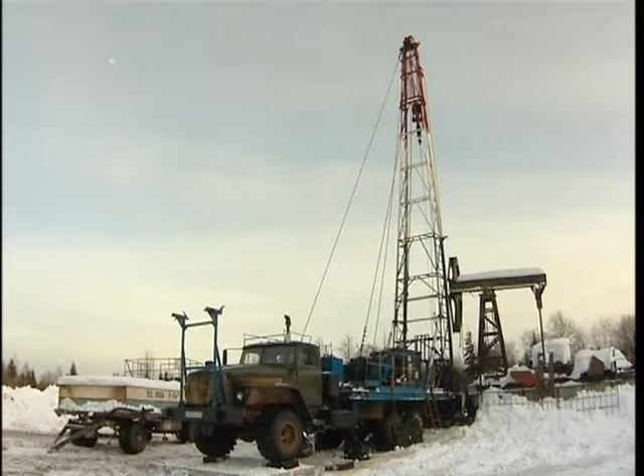Secondary formation exposing is one of the most important tasks solved during well completion. The primary function of any perforation is to ensure dependable hydrodynamic connection in the well reservoir system.

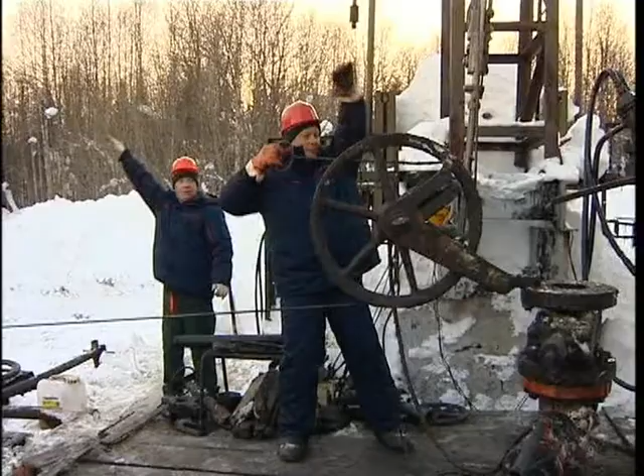At present, there are three main techniques of secondary exposing of producing formations in cased wells: shooting, hydraulic jet perforating, and mechanical method, which includes drilling.

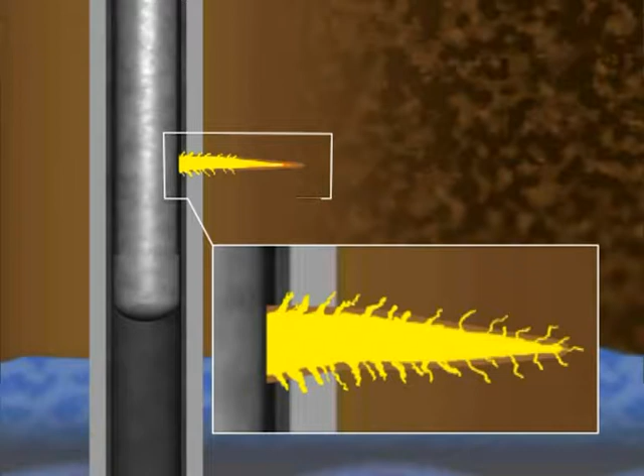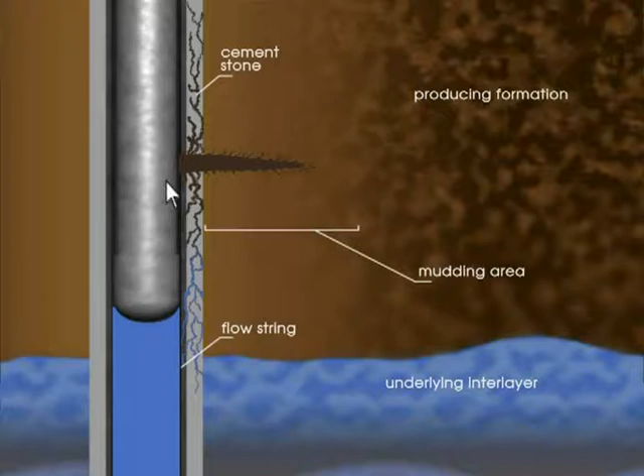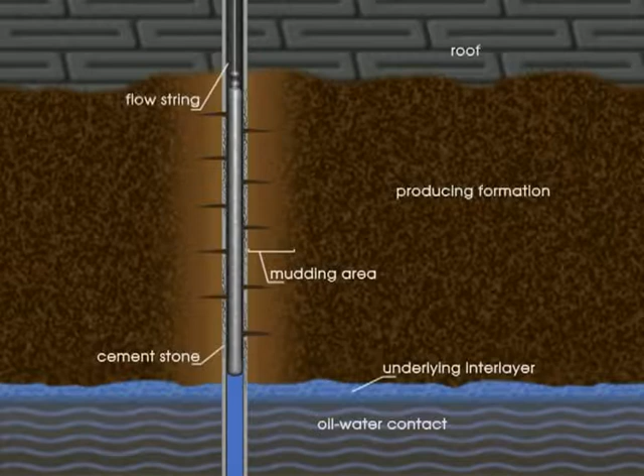Besides, the channels formed are rather shallow and intercommunication between the formation and the well is incomplete. Such exposing does not permit correcting errors made during primary exposing and cementing; they are even aggravated. These disadvantages determined the activity in search for non-impact techniques of perforation and devices suitable for such purposes.

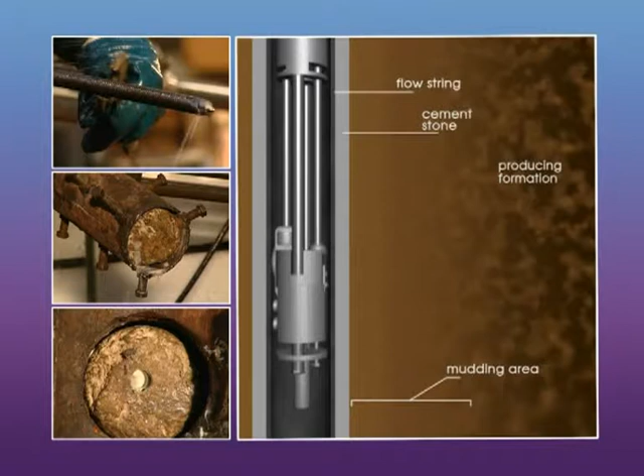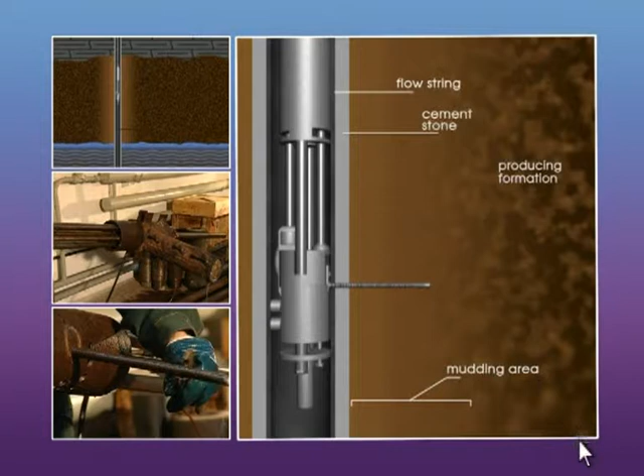Drilling is classified as a sparing technique. Unlike shooting and hydraulic jet perforation, it affects neither the support integrity nor the lithological properties of the producing reservoir rocks.

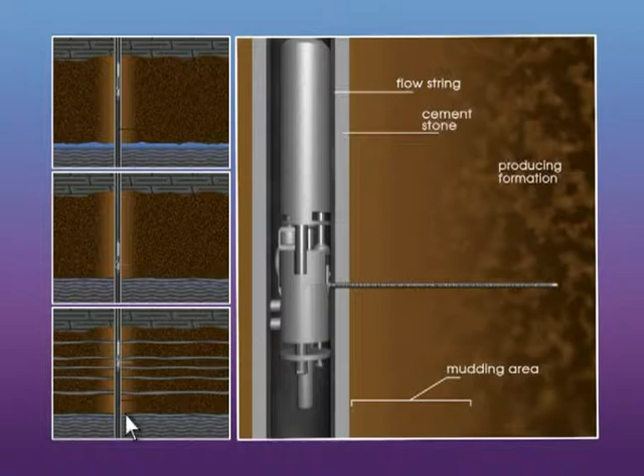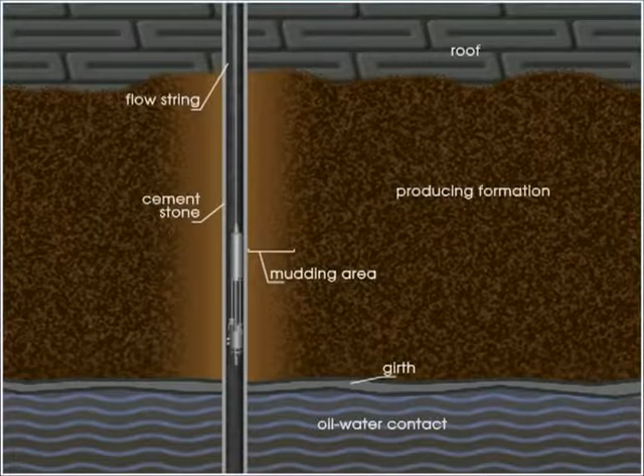Drilling with deep penetration of perforations is efficient in wells of any destination operating producing formations of various types and lithology. However, unlike other types of perforation, the greatest effect occurs when exposing producing formations with bottom water objects, where the oil-saturated portion of the reservoir is separated from the water-saturated portion by a thin, unstable girth, or when exposing permeable interlayers of thin layer formations selectively.

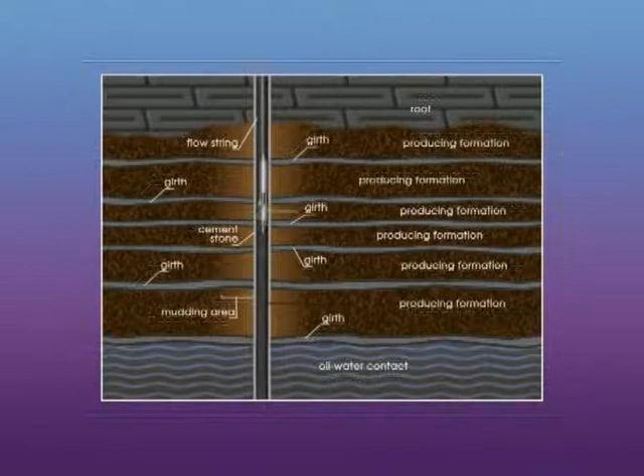A good effect is expected if drilling is used as an intensification method during additional perforation of heavily mudded reservoirs which have been operated for a long time.

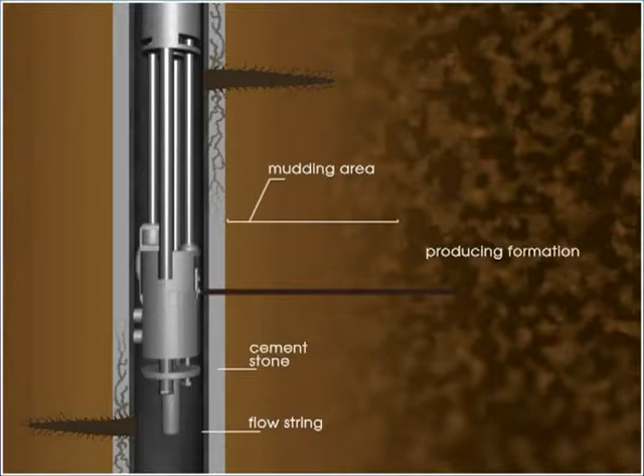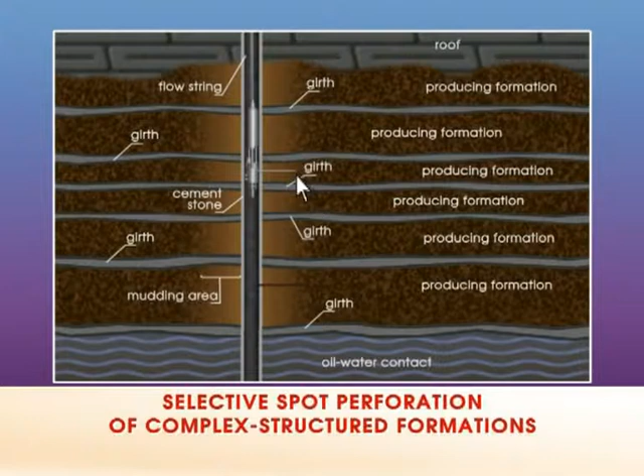Efficient hydrodynamic connection in the well reservoir system. Minimum skin factor. Selective spot perforation of complex structured formations. The well bore support remains unbroken. Thin argillaceous girths remain unbroken. The natural formation structure is not disturbed.

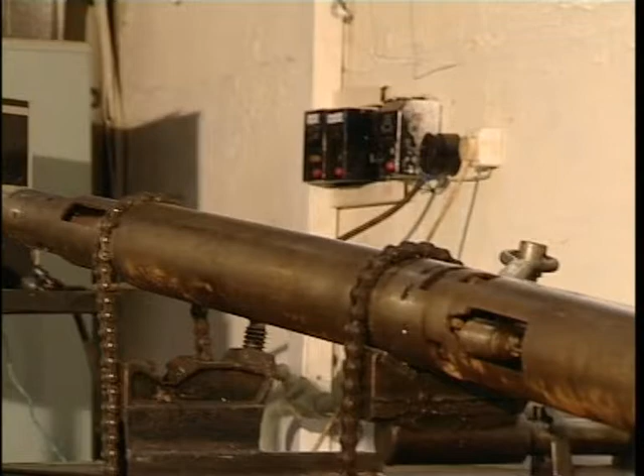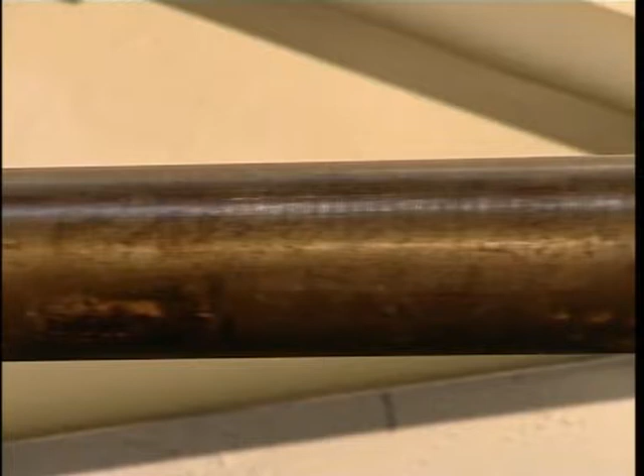In order to solve these tasks, the Permsky Engineering-Technical Center Geophysica Closed Joint Stock Company, together with the ERGIS Scientific Production Enterprise, have developed and put into production the cable tool PS112/18/400 drill, which has a jack bit output of 400 mm and a perforation diameter of 18 mm.

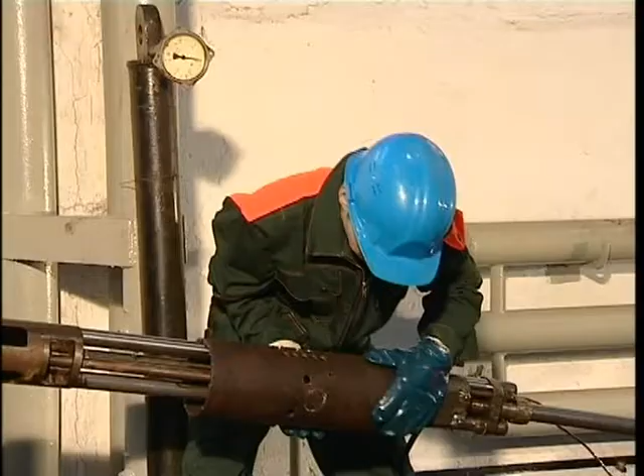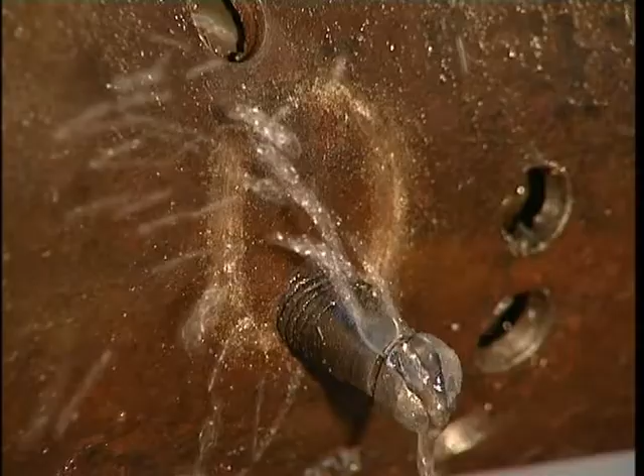The perforator is designed for execution of works in wells of various destination, cased by flow strings of 146 to 168 mm diameter. The perforator allows producing deep penetration perforations through which the well bore intercommunicates with the unbroken formation area, which has natural filtration characteristics, without breaking the well bore support and impairing natural drainage properties of the producing reservoir.

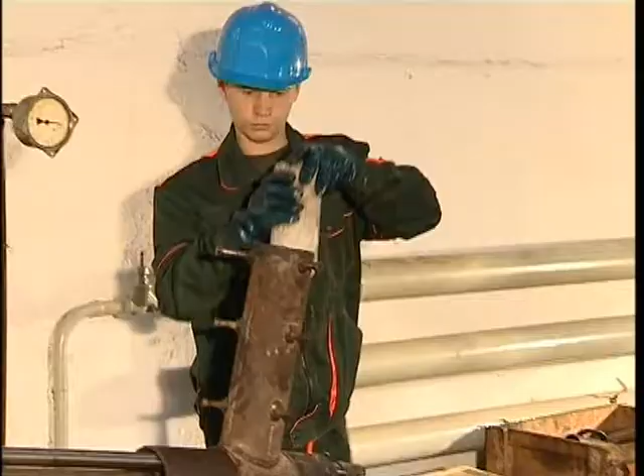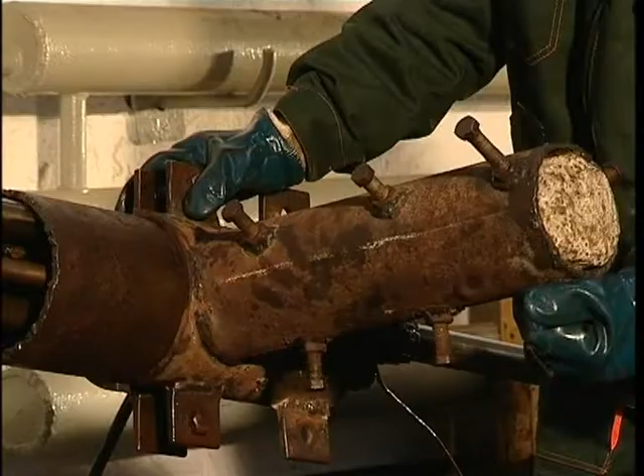The deep penetration drilling technique allows minimizing the skin factor, spot perforating thin layered formations, and formations located near water bearing ones, selectively. Advantages of the deep penetration drilling technique allow achieving optimal operation of productive reservoirs.

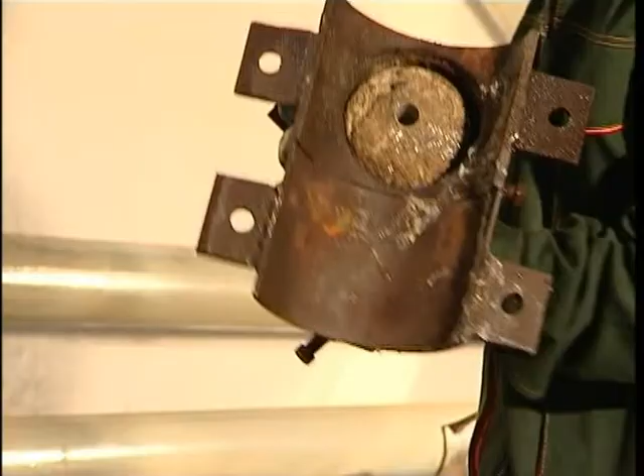The perforator comprises a number of electromechanical and hydraulic systems and assemblies which ensure fixation of the perforator in the well, drilling of deep perforations in the well bore wall and the productive reservoir, and subsequent return of the perforator mechanisms to the run-in initial position.

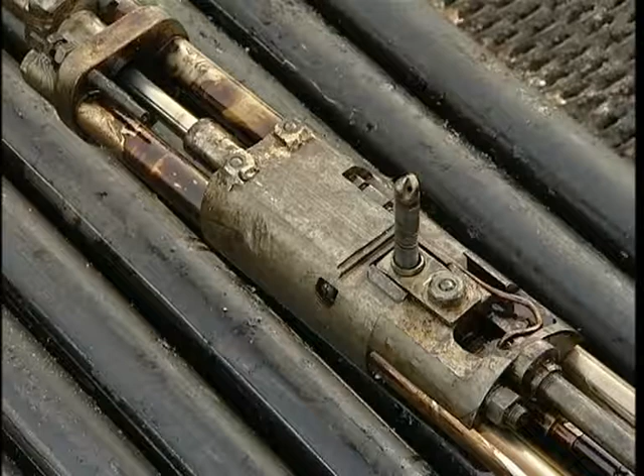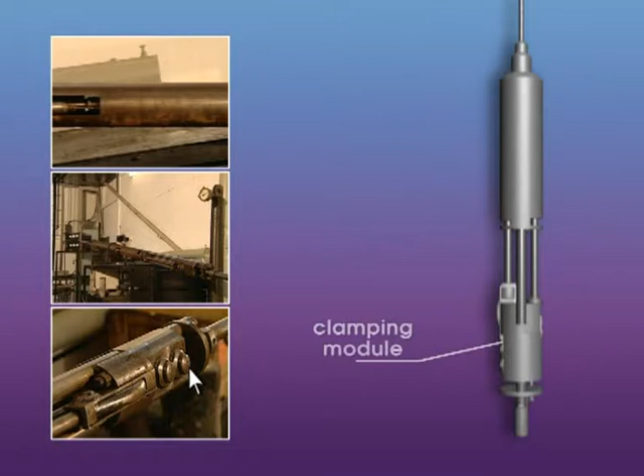The perforator comprises the drive module, which imparts axial advance to the flexible shaft bearing the cutting tool; the clamping module, which fixes the perforator in the well; the flexible shaft assembly, which changes the flexible shaft motion from axial direction to radial direction; and the flexible shaft bearing the cutting tools on its end.

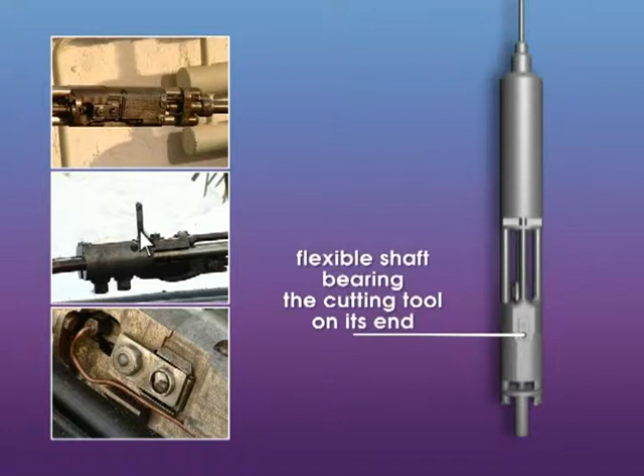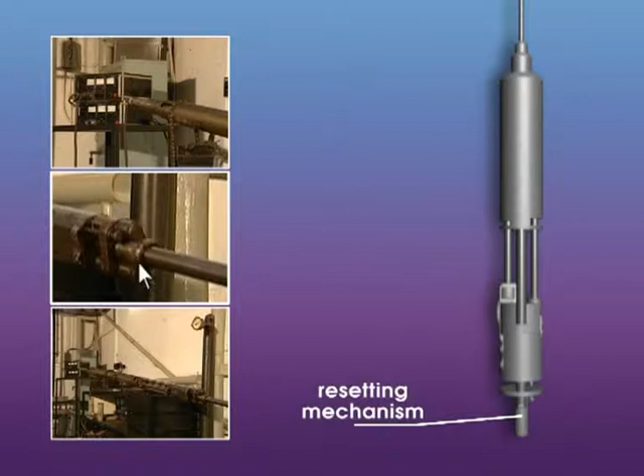The wash-over system is used for washing chips and sludge out of the perforation during drilling. A mechanism is used for resetting the flexible shaft with the cutting tool. The control panel is used for controlling the device from the well surface and monitoring the drilling process.

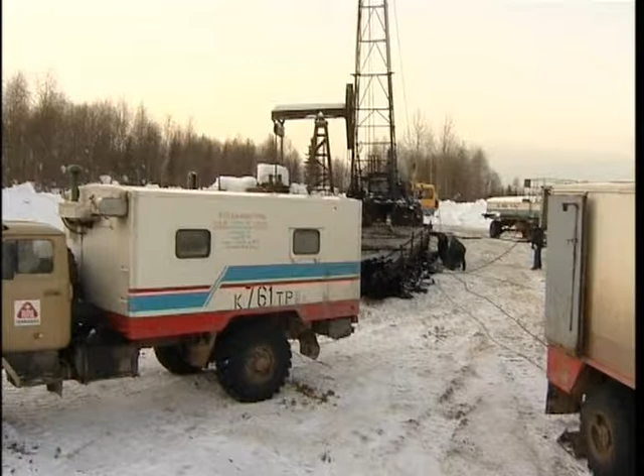Drilling by means of PS112-18-400 shall be performed by a standard geophysical crew equipped with a well logging truck hoist with a 3-core cable of up to 5,000 meters.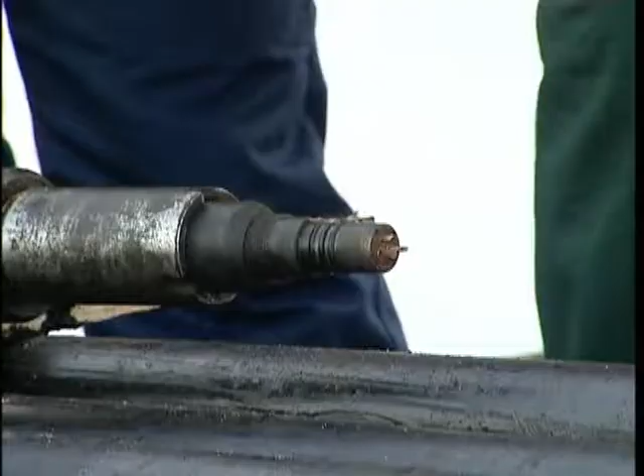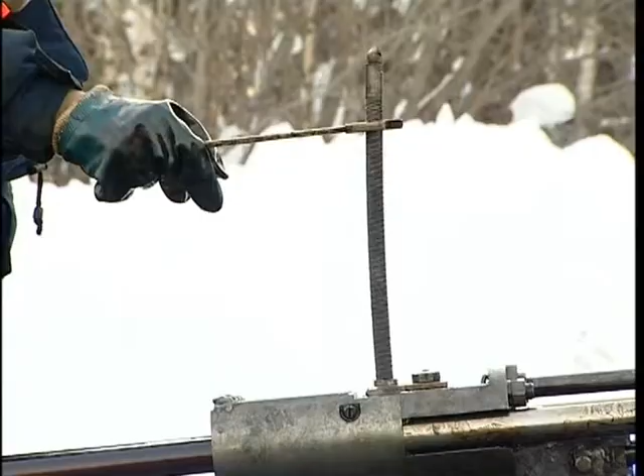Before lowering the device into the well, its functionality shall be checked on the access board. Then the device is lowered into the intended perforation zone using the logging cable.

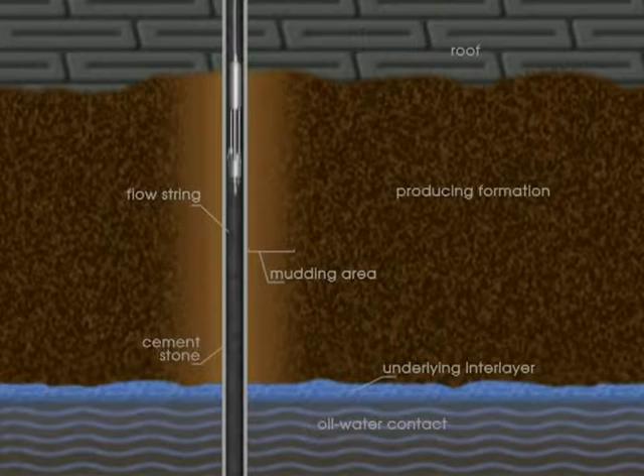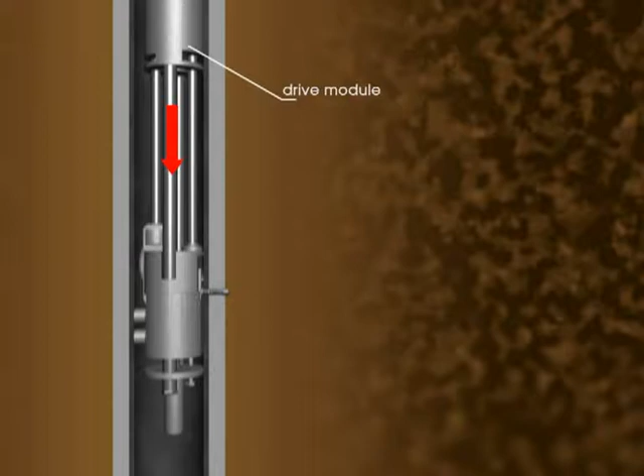The clamping module fixes the device in the well bore, and the drive module produces axial thrust and transmits the rotation force to the flexible shaft with a cutting tool on its end.

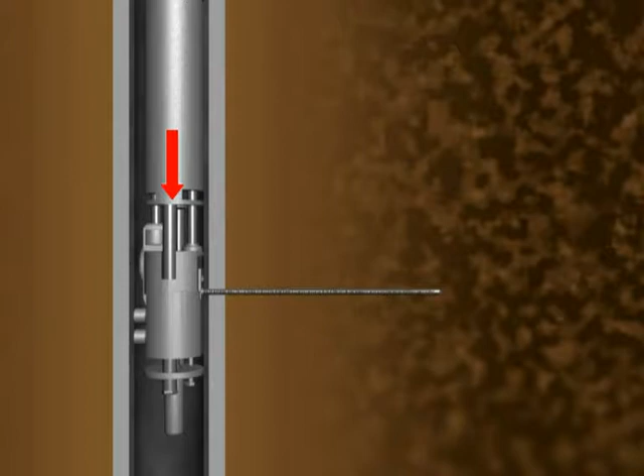The flexible shaft changes axial motion to radial motion. Coming out of the device case, the cutting tool drills the wellbore walls, the cement stone and the rock, producing a perforation of 18 mm diameter and 400 mm length.

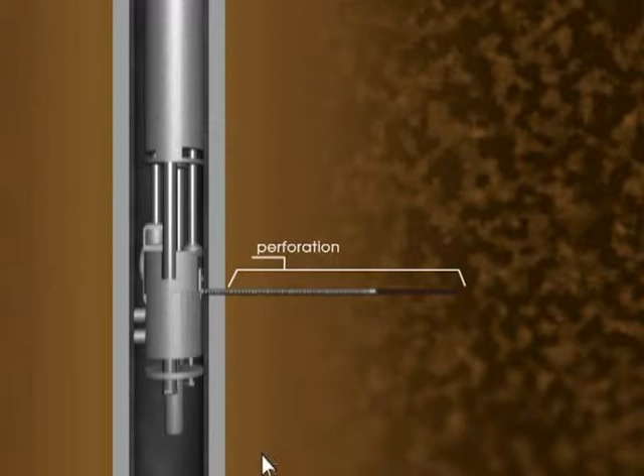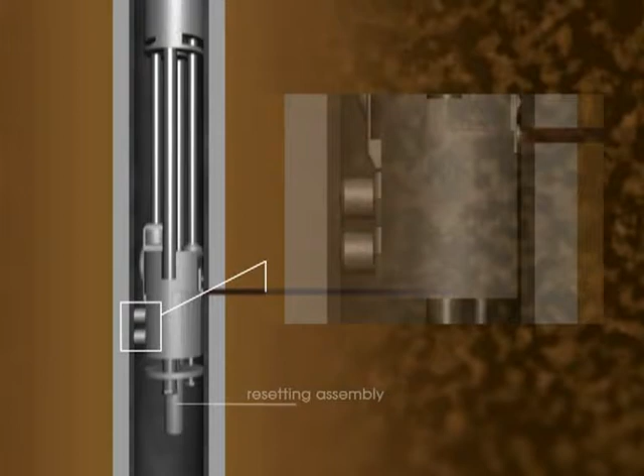Then the resetting assembly resets the cutting tool. The clamping assembly returns to its run-in position. The device moves over to the next drilling point.

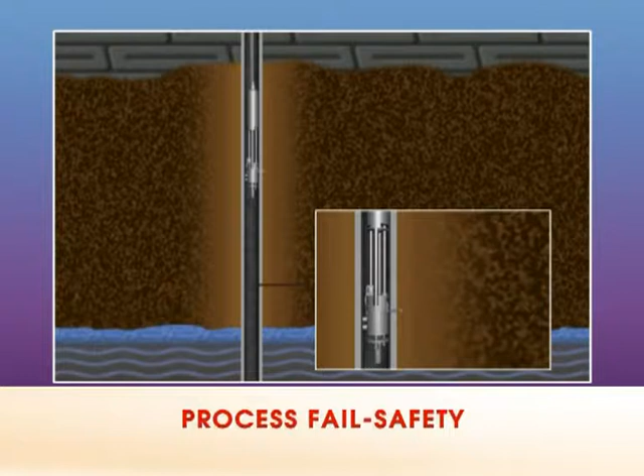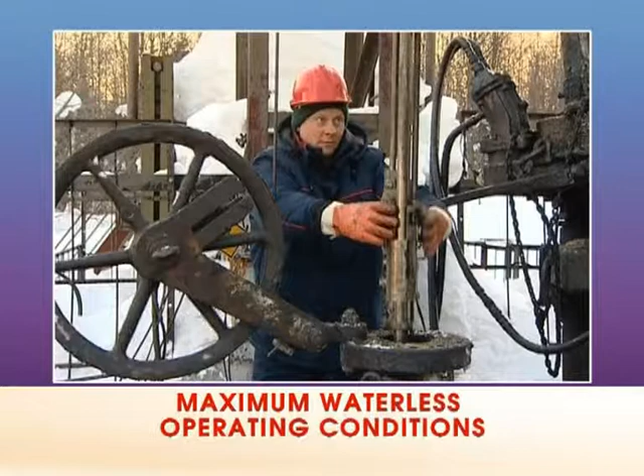Good workability. Process fail safety. Expensive high-power pumping equipment is not required. Environment friendliness and safety of the technique. Maximum waterless operating conditions. Efficient stimulation technique.

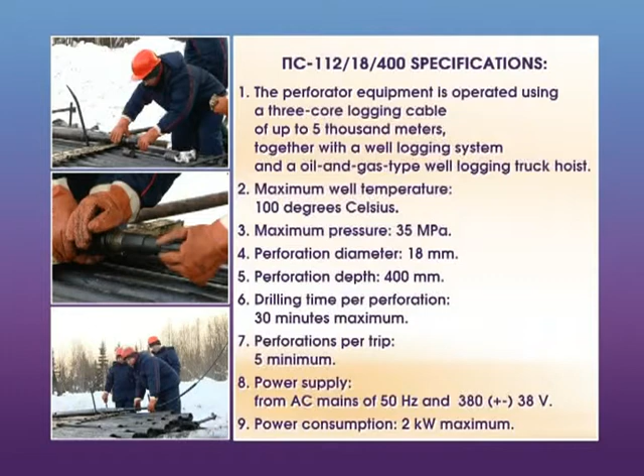Minimum financial costs. PS112-18-400 specifications: the perforator equipment is operated using a 3-core logging cable of up to 5,000 meters together with a well logging system and oil and gas type well logging truck hoist.

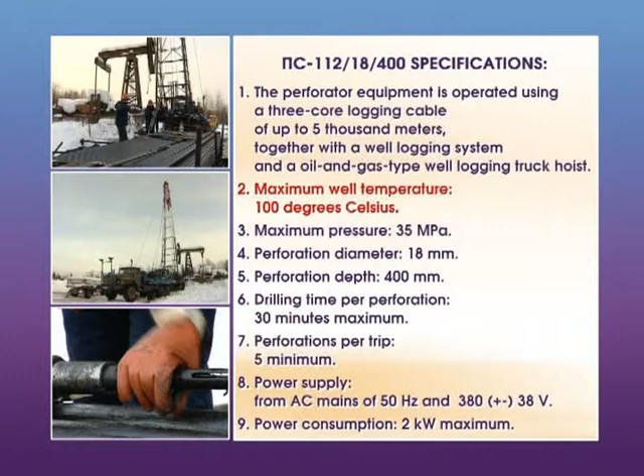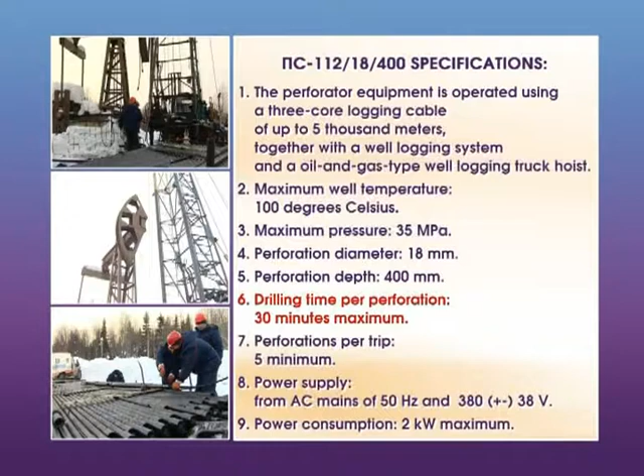Maximum well temperature 100 degrees Celsius. Maximum pressure 35 megapascal. Perforation diameter 18 millimeters. Perforation depth 400 millimeters. Drilling time per perforation 30 minutes maximum. Perforations per trip 5 minimum.

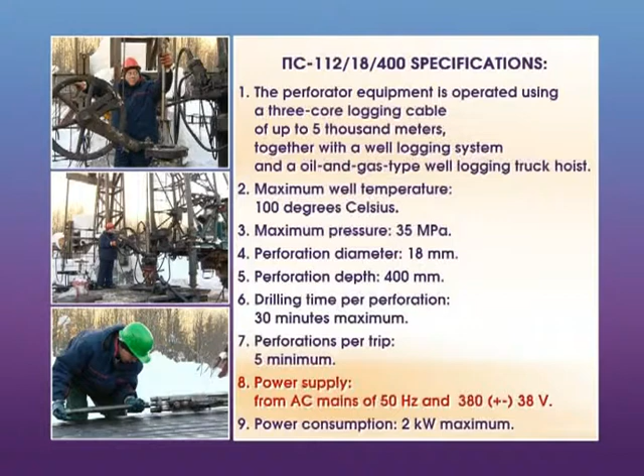Power supply from AC mains of 50 Hz and 380 plus minus 38 volts. Power consumption 2 kilowatts maximum. Overall dimensions of main constituents of the PS112-18-400 equipment:

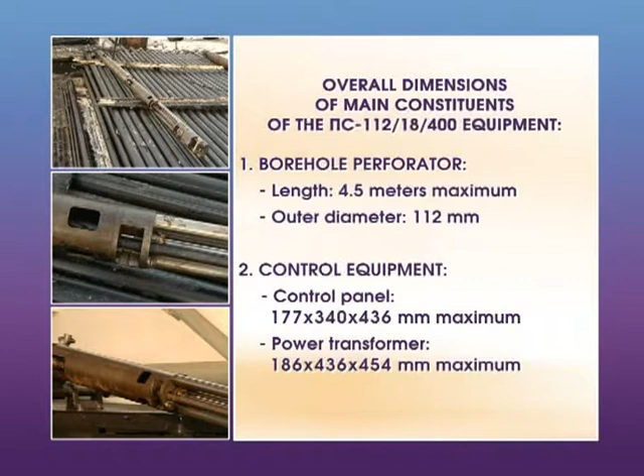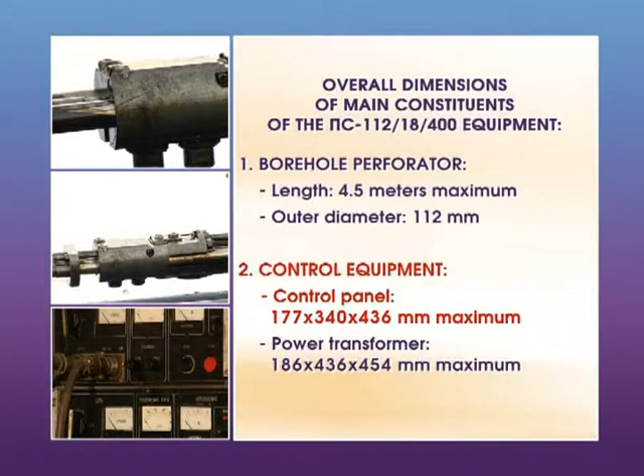Borehole perforator: length 4.5 meters maximum, outer diameter 112 millimeters. Control equipment: control panel 177 by 340 by 436 millimeters maximum. Power transformer 186 by 436 by 454 millimeters maximum.

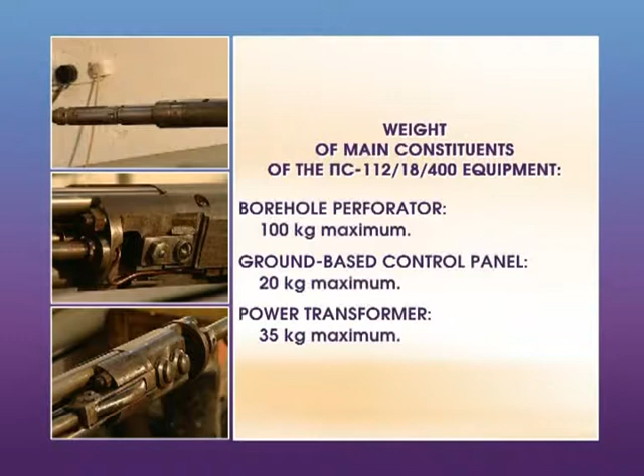Weight of main constituents of the PS112-18-400 equipment: borehole perforator 100 kilograms maximum, ground-based control panel 20 kilograms maximum, power transformer 35 kilograms maximum.

The PS112-18-400 new generation deep penetration drill opens promising capacities for secondary exposing of complex structured productive reservoirs of various lithology.

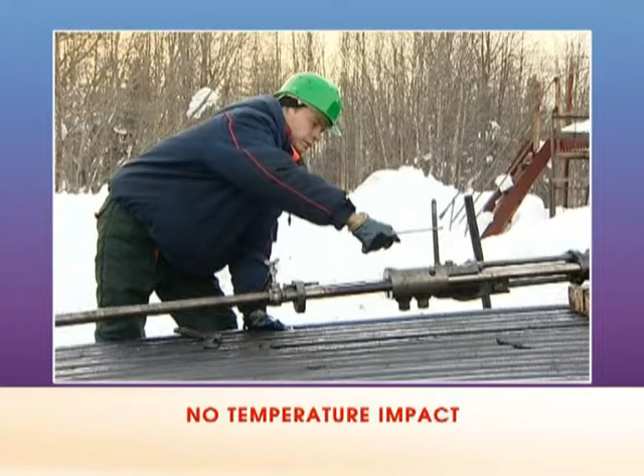No repression on the productive reservoir. No temperature impact. No breaking loads. The flow strings and the cement stone remain unbroken. The reservoir preserves its natural structure.

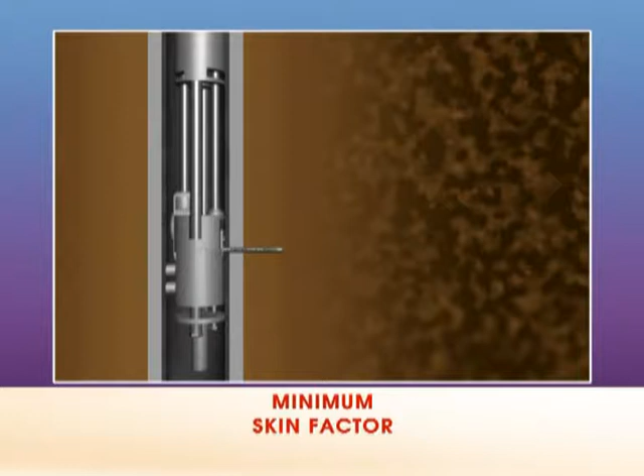The perforation wall drainage area is increased. Minimum skin factor. Optimum operating conditions of productive reservoirs.